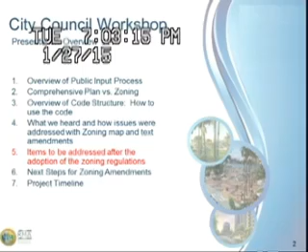One other item we've inserted into the presentation today that you don't have, just one slide at the very end, is to address all of those issues that we will need to address at the end after the zoning is amended for each one of these districts. So I wanted to highlight that before we end the presentation tonight, and then obviously the next steps for implementation and the project timeline.

In terms of the public input process, I know I don't need to tell the council we've had extensive public input throughout this process, but for those listening for the first time, I do want to say that we started this back in March of last year, where we held a kickoff meeting both for the comp plan and the zoning amendments.

Since then, we've had extensive stakeholder interviews, interviews with the council. We've had specific planning workshops held within each one of these zoning districts or neighborhoods, one in particular for the downtown, then the Intracoastal Mall area, and the Highland Village area.

We then reconvened for another workshop with the council to go over all of the entire recommendations for both comp plan and zoning. That was in October. Then starting in January, we held another workshop specifically to address the changes to the comp plan. As you know, we went to Planning and Zoning Board in January to take forward the comp plan amendments, and then we had first reading just a couple of days ago, essentially, for the comp plan.

Today, we are actually holding, again, the workshop just to address the specific zoning changes, both to your map as well as to your text for each one of these districts.

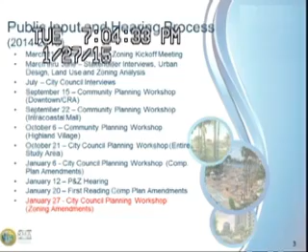So with that said, again, the order in which we're going to present the material is the same order in which we did it for the comp plan. We're going to break it down by the different sub-areas, by the different district areas, beginning with the town center, which is your Fulford City Center, then your employment centers. Then we'll discuss the waterfront districts, the three of them, the mixed-use corridor, which is the area to the south near Arch Creek and Highland Village. And lastly, we'll discuss the neighborhood center mixed-use district.

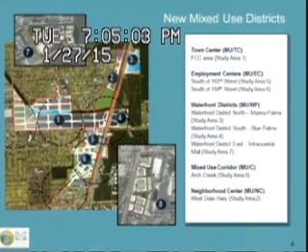In terms of the difference between the comp plan and the zoning, one of the things we've been talking about all along is explaining that difference so people understand why we discuss certain things in the comp plan and other things within the zoning.

Your comprehensive plan, the way it's written today, establishes very general land use categories, and with that are established very general goals, objectives, and policies for each category. Your existing comprehensive plan, or future land use map, establishes maximum densities for each of those land use categories. This is how the comp plan is currently structured.

Your zoning, on the other hand, establishes very specific zoning districts that fall underneath one of the land use categories currently designated in your land use plan. To illustrate, you might have a property that within your future land use plan is designated as commercial, but in that same area there are specific zoning districts such as B1, B2, B3 that fall under that same general land use category but have specific zoning criteria.

So your zoning establishes your maximum densities, your maximum heights, your specific lot standards such as setbacks, lot coverages, etc. All of the details that the comp plan does not entail.

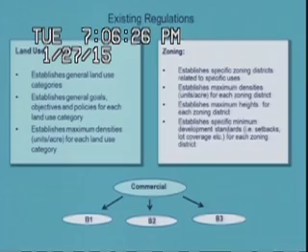In terms of the proposed amendments, we are still proposing to contain within the comp plan and the zoning the same level of detail. For the comp plan, our main objectives, as Jean has presented to you.

Our main proposed changes to the comp plan entail refining some of the existing mixed-use categories, consolidating some of the land use categories that exist today into new mixed-use categories, and then refining the goals, objectives, and policies based on the development scenarios and objectives we've collaboratively developed through your strategic plan and discussions with the board, council, community, and stakeholders about specific objectives for each area. So those have been refined.

In terms of the proposed amendments to the comp plan, the biggest change we've brought forward has been replacing the maximum density allocations for each site with a basket of rights concept. I'll explain that in a minute.

I know we've had several questions and confusion in past meetings, so I've added two slides just to explain that concept, which I think will bring some clarity.

In terms of the zoning, we are still establishing your minimum development standards that entail lot coverage, setbacks, height, and all the specific criteria each development has to abide by.

But in addition, because we're creating a form-based code, we're moving away from text-oriented language to a more visual one, to guide development and ensure the necessary development standards needed to illustrate the kind of development the city wants, and to balance the built environment with the open environment, as well as the aesthetic quality we want NMB to achieve.

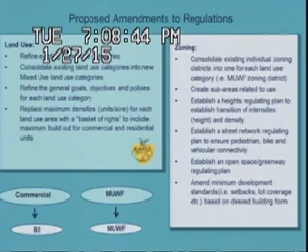So in general, we're going from a general land use category of commercial in certain areas and converting that into a mixed-use district. We've created 7 new districts, all unique in themselves. And we're converting from specific zoning districts such as B1, B2, B3 into another mixed-use district, so all of those will be collapsed onto one mixed-use district.

In terms of the basket of rights concept, I know the question came up last time as to how we arrive at the existing current entitlements, and how we come up with our maximum entitlements.

These next two slides that I'm showing you were not in your package. We developed them after the presentation, after the first reading, to address the comments that came out of that meeting. I hope it adds a little clarity for you as well as for those listening, to address the question of how we came up with the current entitlements.

Can we get copies of those? The type size is too small to see clearly. If you'd like, I'll leave them to the end, and if you have questions I can bring them up. That'd be a good idea—want me to get copies made so you can share?

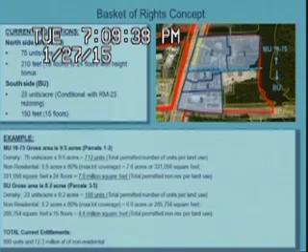Do you want to just run and get those copies?

Could I ask, you've done this presentation many times, but in going over the land use, I thought we were going to concentrate on the zoning. So instead of going over what we did and said, is that really the way to make us have a better understanding? Or should we go into the zoning and then you can always go back?

Well, you're just setting up a little bit of preamble, right? Let's let her make the presentation. They've timed it out, so they know what they're doing. Let's go to that.

That was the question I was asking, though. Can I ask one question, Mr. Mayor? With the comp plan, the workshop was more or less us being lectured. Is there going to be a time when we are going to have a discussion and discuss ideas amongst ourselves?

Yes, there's no reason why we can't do it tonight. I've broken up the presentation into basically 3 parts. The second part, which I'm about to get into, has to do with how to use the code. If you listen to that, then we can stop, break for questions, and then go into the specifics as to what issues we addressed in each district and how the code addresses it. Because if we get the general picture first, we might be able to stop there. Is that okay? Let's carry on.

Okay, so the next part is the code structure and how to use the code. Again, I was explaining that difference between the comp plan and the zoning just to understand on a basic level what we're proposing to change.

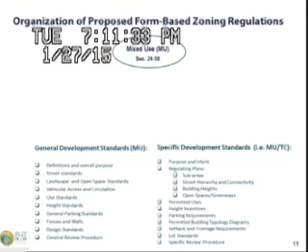In terms of the zoning, we're proposing one overall general mixed-use district called the MU, where all the general development standards that apply to each of the mixed-use districts in the 7 districts will be allocated. Underneath that, there will be 7 separate zoning districts established: town center, employment centers, neighborhood center, corridor, and waterfront districts. All of those have unique, specific criteria that are only unique to that district.

So in the general development standards, you will find all your definitions, the overall purpose and intent of creating a mixed-use district, your general street standards, landscaping and open space standards, use standards, general parking standards, fences and walls, and design criteria.

But then in your specific mixed-use districts, like your MUTC, EC, and so forth, you will have the specific purpose and intent for that district. All of the regulating plans addressing height, compatibility, the street network, and required open spaces will be addressed in each particular zoning district, as well as specific parking requirements, permitted uses, lot standards, and so forth.

So I'm going to start by briefly showing you how you would utilize the code, and then you'll get an idea for how it's actually organized.

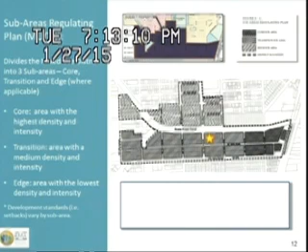If I were a piece of property, let's say I own a piece of property on the east side of 19th Avenue, just north of 164th Street or Hanford Boulevard, and I wanted to know what the code allows me to do with the new development standards, the first step would be to identify which sub-area location my property is located in. This is important because we have a sub-areas regulating plan.

Every mixed-use district is divided into approximately 3 sub-areas, wherever applicable. Some mixed-use districts don't need it because there aren't any issues with adjacency and compatibility with existing single-family homes, so there's no need to break up the district. But other districts, such as the downtown or the employment center, we create these plans to show in a graphic way exactly what that transition needs to be.

So the areas with the most intensity permitted in terms of height and density are allocated in the core sub-area, which is why we have an area called the core sub-area. The area with medium density, or the transition, is the area between the most intense and the least intense.

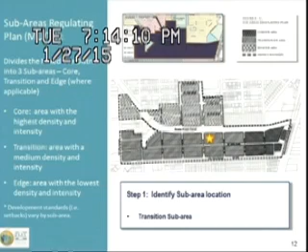And then obviously the edge sub-area is the area with the least intensity that is permitted, both for height as well as density. So that's the first step.

The second step, again, here's my property, is to identify what the surrounding street designations are that have been designated for the property and the streets that are immediately surrounding the property.

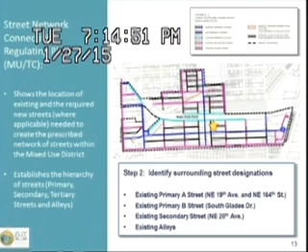This particular property has street designations of primary A, primary B, secondary street, and alleyways. I know that doesn't mean anything to you today, but in the regulations, there are specific criteria for each one of those streets. This plan shows the location of those existing as well as required new streets where applicable. Not every district has that condition, but where it's needed in order to create that prescribed network of streets, that walkability, that pedestrian environment where we want more streets, smaller blocks to encourage that walkability environment.

In addition to that, this plan establishes the hierarchy of the streets. Do you have a question?

Okay, at the risk of us going off the rails, but go ahead. Well, when I was reading this, primary A street is 19th Avenue and 164th Street, and you flip to the next page and it says primarily pedestrian-oriented streets. Is 19th Avenue ever going to be primarily pedestrian-oriented? I'll get to that. I'll get to answer your question when I get to that next slide.

Remember what I am addressing right now: the first part of the code is very general in terms of understanding how to utilize the code and some of the general parameters. In every district, every classification of those streets is going to have a different meaning. So in the MUTC, the primary designation has one meaning, and it's still generally the same for all the districts, but it's going to be tailored specifically for that district. So you will see that when I show the other street designations.

Could you repeat what you just said? Because what I thought I heard you say is that in every one of these mixed-use districts, there are going to be different definitions— No. —for primary A, primary B. So let me get to the next slide.

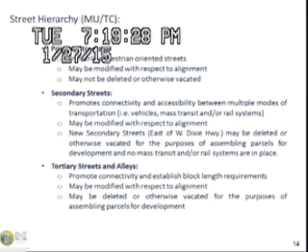Today I'm focusing on the town center, but to give you more information, you'll see within your packages that for each district we've done existing conditions, street sections of the existing conditions for each street we've designated a hierarchy to, and then shown the potential redevelopment of those streets to improve the public realm.

Whether they are primary, secondary, or tertiary, we've addressed it because we think the primary issue is to address pedestrian connectivity and improve the quality of life within the area.

In addition to the new regulations that establish minimum design standards like minimum sidewalk width and minimum landscape width, we've added, for the CRA areas—the town center, the neighborhood center, and the employment center, everything west of Biscayne Boulevard—

for areas within the CRAs, we've created an additional tax rebate, a tax increment rebate incentive, to encourage these kinds of things to happen. I'm going to discuss that in more detail as we get further into the presentation.

In the other areas, like the waterfront districts and the corridor, the streetscape improvements are actually required in exchange for the entitlements that we've given. This is consistent with everything we've been discussing thus far in terms of the design analysis.

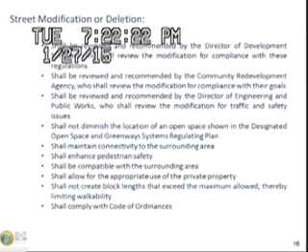It gives the city planner the authority to look at it and ensure it makes sense in terms of connectivity. And obviously, for engineering and public works, to ensure traffic and safety have been addressed. So there's plenty of flexibility, and at the same time enough criteria that keeps the intent alive for that particular district and the overall goals of improving quality of life within the city.

There are numerous criteria they have to follow to do that. The next step—here's my property, the third step, excuse me—is to identify the surrounding designated open spaces and greenways for that particular property in the district.

If you recall, in the MUTC area, we talked about the possibility that certain blocks could redevelop entirely, simply because of the condition of the existing buildings and because the land ownership and aggregation is already there with single property owners.

And we talked about the possibility of those sites contributing to the public open spaces, to the network of public open spaces within the city. So one of the things we've done, especially in the CRA areas, is given an additional incentive: if you do public open spaces, you get a tax increment rebate.

But for this particular site, when you're looking at it, you identify that two things have been designated. One is an urban greenway, which is the area along 19th Avenue—a street that's been called for to be designated and designed as an urban greenway.

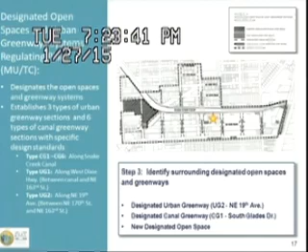And the Canal Greenway, which is the area along South Glades Drive, along the Snake Creek Canal, as well as a new designated open space.

With the designated open spaces, there are new regulations that establish minimum design standards, so that it's not just a piece of property that's been dedicated or called an open space but has no real meaning for a person to utilize. So we have specific development or design standards for each one of those.

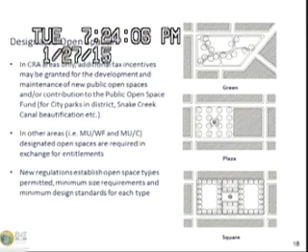For the greenways, just like the streetscapes, we have street sections that illustrate the potential redevelopment of, for example, the Canal Greenway along South Glades Drive, showing the area between the private property and the public property. All of that constitutes the urban greenway.

Within the public side of the greenway is the area that's within the right-of-way along the street edge that contains the public sidewalk and landscape area. We show potential improvements for what we would like to see that area become. There are about 5 different sections created for the entire Canal Greenway along Snake Creek Canal, both north and south, addressing each of the specific right-of-way conditions along the Canal Greenway on both sides.

It also shows on the private side what the minimum required setbacks as well as frontage requirements are within the private site that the developer would have to adhere to when the site gets redeveloped. All of this together creates the overall greenway environment, which improves the quality of life and pedestrian accessibility within the city.

The next step is to identify the maximum allowable height permitted for your site. This property that we've been discussing is permitted a maximum of 25 stories, or 315 feet. Somebody corrected us - we had the wrong number when we were cutting and pasting. In this particular location, that site is permitted 25 stories or 315 feet.

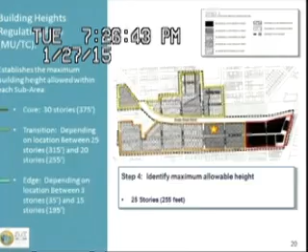The next thing is to select the building type for your property. In the general mixed-use regulations that apply to all mixed-use districts, we've created a series of building types. Because the code is form-based, we're careful of the massing, scale and look of the building. We're not dictating architectural styles, but we are dictating massing and scale to encourage a more pleasing environment and quality of life, since massing and scale affect view sheds, light, and the balance between built and unbuilt environment.

We've provided a total of about 7 building types, from the most intense to the least intense. Your tower building type is the most intense - it is required for any development higher than 8 stories. From there you have the liner, the courtyard building, the flex building, townhomes, side yards, and courtyards, ranging from most intense to least intense. All of that detail is in your package.

Not all of the building types are permitted in every sub-area. The reason for that is to ensure we have that transitional element for the heights and intensities maintained throughout that district.

You will see that in each one of those diagrams we create, for each one of these building types, we specifically state in plan view, section, and 3D your minimum development requirements - setbacks, lot widths, lot areas, lot coverages. We're making it very visually clear for both the developer and the property owner the intent of the overall development. We don't want ambiguity, so we're creating more illustrations to make this code easy to read.

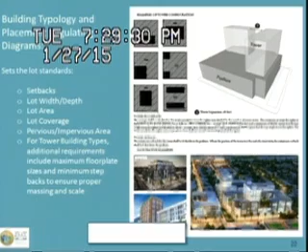Can I just ask you one quick question?

The slide from two back, the one before this that says figure 7, the little diagrams on the right - that's a tower? In other words, that's a tower. Yes, that is a tower.

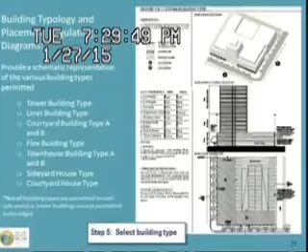Then the next thing is to basically review what the permitted uses are for your property. Now that you know your sub-area location, your maximum height, and what streets or open spaces you're required to improve, develop, or provide, you just look at your permitted uses table.

We didn't include this because all we did was take the existing uses and categorize them so it's easier to review. We're going to provide that in your next package. Essentially what we did is clean it up so it's easier to find a use when it's grouped into a specific category.

Obviously we've broken it up by sub-area, so just like the building types, uses are regulated by which sub-area they're in. The most intense uses are permitted in the most intense sub-area and so forth.

This is basically the last step of how you use the code to interpret what development potential you have for your site - reviewing all the additional standards that apply, such as parking, signage, landscaping, required assessments, the approval process or conditions. And this one in particular has to do with the tax increment rebate incentives.

We developed a menu of options specifically for the CRA areas - your town center, neighborhood center, and employment center. Almost the entire town center zoning district is within the CRA area. There are portions outside, such as the Nova University site and portions of the west, that are not within the CRA, but it applies to most of the area within the CRA. The entire neighborhood center is within your CRA, and almost the entire employment center is within your CRA - only a portion of the east side of West Dixie is not.

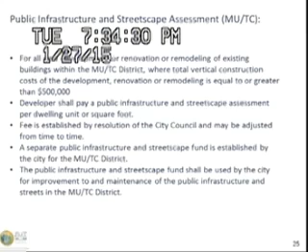One thing to note is that we're making it very flexible. If there's already a project in place or in the capital improvements program for the city, say for 19th Avenue or the West Dixie corridor, and it's better for the city to take the fee and allocate it toward that overall project, the developer and city have the ability to do that. Whereas for other streets, it may be better for the developer to build the improvements themselves because they'll see the improvement happen quicker, and that benefits the city too. So this allows flexibility for both options: pay into the fund, or develop the streetscape improvements and still get the tax increment rebate.

The public open space assessment follows the same criteria. The purpose of this fund is to utilize it specifically for the Snake Creek Canal greenway improvements. Depending on where the city is, they may prefer to take the money and do it as one large continuous project, but it's specifically used for that, as well as existing public parks, open spaces, and recreational areas already within the mixed-use Town Center District.

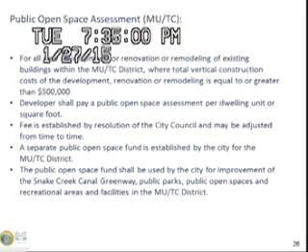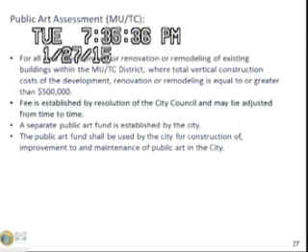The public art assessment is similar. The only difference is that since the city is interested in an overall public art fund for the entire city, we felt that monies collected for this fund could be utilized citywide, not just for that particular district. For renovations of existing buildings, the fee could be established by the city council. However, for new development, we've proposed allocating 1% of total cost of construction. That's something to evaluate.

The last couple of steps have to do with the approval process and what's been specifically prescribed for that particular district in terms of conditions or approval process. For every mixed-use district, all 7 of them, there is a pre-application meeting required, spelled out in the general mixed-use district regulations that apply to all. This is specifically addressed for each one to cover its specific issues. Just like the comp plan, where we identified specific issues for each mixed-use district, we've identified the same within the zoning for each district. For the MUTC, the issues were treatment of the Snake Creek Canal, the alleys and utility issues, public art, and incentives for redevelopment within the CRA.

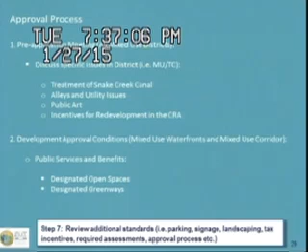The second component is the development approval conditions. For all the other districts, meaning the waterfronts and the corridor, since they're not within CRAs, we've spelled out specifically at the end of each district's text the specific development approval conditions. In the mixed-use waterfronts, as I'll show in the example later, these are the expected public benefits and services we've discussed—open spaces, greenways, traffic mitigation—all specific to each district.

So we can stop here if you'd like. Yeah, good, okay. All right, so now we want to get into questions about the mixed-use TC district. Is that the deal, or before we jump to the next one? The general overall structure, if you have any general questions. Okay, we'll start with that.

Got one here. I really just want a little bit of clarification regarding that presentation. Let me just save it.

Thank you. This tax incentive, is it a one-time thing or is it continuous? How does that work, so that everyone understands?

We have not ironed out all those details. We've been talking about it internally with legal. This is something the council needs to determine, whether they want it to sunset at the end of the term of the CRA, or sooner. It's up to the council to decide how they want to do that. We haven't specified it yet, but it follows the existing CRA tax increment rebate process, so it would be similar.

How many years do we have left in our CRA? Anybody know? Did I see Rasha here? 14 years? Might be 14 years, through the duration of the CRA.

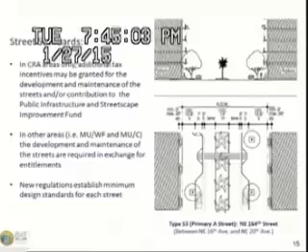When you mentioned the thing about turn lanes and stuff like that, is that up to us or is that a DOT thing?

Depending on who owns the road, if it's a city road, it's up to your engineering department to determine what that level of improvements are.

So would that apply to this road, or would that be county? Tell us what needs to happen there. I believe Hanford is a city road. Am I correct? Yes, I believe Hanford is a city road. But for example, West Dixie, there's portions that are owned by the county, so you will have to coordinate between the county and the city for the ultimate right-of-way improvements.

So it's county, not FDOT. At what point does FDOT get in there? Is that only Biscayne? Only when it's an FDOT or state road. Okay, correct. All right.

I didn't mean to sound like I knew something that other people didn't know, but I think this is a good time, since we've had this discussion, to clarify how traffic studies fall into play with all of this, when they're needed, for the audience.

To address the issue of the number of lanes and whether you need to expand the right-of-way from what it currently is today, that's something that's going to be decided at a site plan level when the site plans come in, and then you do the traffic analysis for each particular site.

Now, the regulations that are in here. Can I just ask one quick clarifying thing? When you say extend the right of way, you're talking about widening a road. Correct. Okay, in plain English, that means widening a road, right? Correct. Widening the road, because I think Councilwoman Spiegel said, what if we need to widen the road? Is this going to lock it in place?

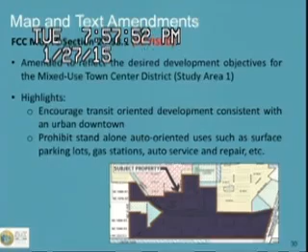Again, some of this you're going to hear is a repeat, but if you recall, based on the comp plan discussions, the things we are addressing in the town center is really to encourage a transit, pedestrian-oriented environment and developments, and prohibit standalone auto-oriented uses such as surface parking lots, gas stations, auto service and repair. Some of these general policies and objectives have been carried through into the zoning as well.

The issues that were raised for the TC were the treatment of the Snake Creek Canal, the alleys, the utilities, public art, and the incentives for redevelopment in the CRA. Some of this is repeated, but I want to show you in the language where we've addressed it. At least for the TC, is the only one you're going to hear twice.

Basically, section 24-58T of the mixed-use district, this is where we require in the language specifically a pre-application meeting for each and every one of these zoning districts. For the TC in particular, to address at that meeting prior to any site plan applications, the utility locations in alleyways, the treatment of the Snake Creek Canal, the placement of public art, and the eligibility for tax increment rebate. We've put this in here to remind staff, whoever it is that's here five to ten years down the road, that was the focus of that particular district.

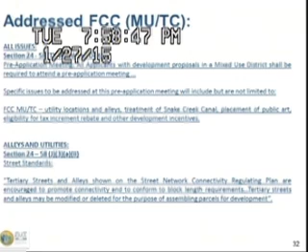In terms of the alleyways and utilities, if you recall from the general mixed-use standards as well as here within the MUTC, we have specific language that talks about tertiary streets and alleyways having the ability to be vacated in order to allow for parcel assemblage. So that's just to illustrate where in the code that is.

Same thing with the Snake Creek Canal. By implementing the open space and urban greenway systems regulating plan within the code, we've actually provided those illustrations that show specifically the kind of improvements we want along the canal and those greenways, those streets that have been designated as greenways.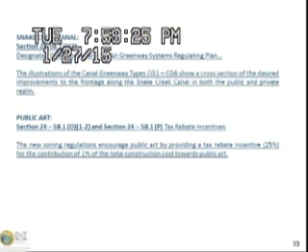In terms of public art, we've created that table, that menu of options for tax increment rebate, one of them being the public art, and we talked about the assessments. We talked about that menu of options.

So I'm going to jump right into the employment center, since this is the new district, and we're going to talk about specific issues within that district. If you recall, during the whole discussions, both through the design analysis as well as the comp plan amendment process, the main objective or goal of that particular district is to encourage economic development that is supportive of high technology and service-based activities that will bring an employment base to that particular area and for the city overall.

In addition to that, we talked about limiting, as one of the goals, all types of auto-oriented uses. Not in terms of limiting them entirely—we're still allowing them and they're acceptable—but they have to conform and be designed in a way that it's compatible with the pedestrian environment, and that it encourages pedestrian and transit use.

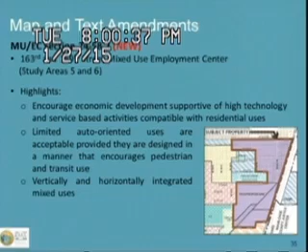We encourage vertically and horizontally integrated mixed uses, so this is not the kind of district where everything has to be vertically integrated. You're allowed to have standalone non-residential uses as well as standalone residential uses, and it's still considered a mixed-use district because you have a mixture of higher, more intense types of uses within this district.

In terms of the issues that were raised, this one in particular, we had the compatibility issue with the adjacent lower density residential, single-family residential to the west, and the potential historic designation of the TICO building. Those were the two issues that were raised during the whole process.

In terms of how we've addressed them, through that pre-application meeting, any development that comes into this site, we've specifically requested or require within the code that they have to address the issue of compatibility with the residential. We also talked about requiring some sort of clearance that the land is developable within the employment center district, especially if it's the area along the former TICO site.

Did you want to ask? Yeah, did we ever determine for sure if that TICO building is historic or not?

But it needs to be addressed when people come in. I don't think they'll be coming in very soon on that side, but they know they have a historic building. Enough said. Cool, thanks.

So in terms of compatibility with the adjacent single-family area, this specifically addresses the former TICO site on the west side, just south of 159th Street. In section 24-58.2 of the Employment Center District, we've put in specific language addressing the land use principles and the requirement for that transitional area immediately adjacent to that single-family residential.

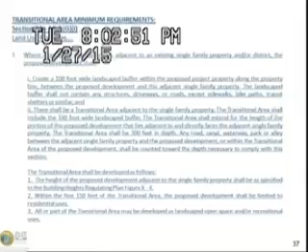One of the other requirements is that within the first 150 feet of that transitional area, any new development proposed there has to be residential in nature, so it's compatible with the existing single family to the west.

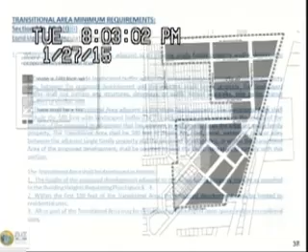Here is the Building Heights Regulating Plan for the entire Employment Center District, including both the 163rd Street South and the 159th Street areas. You can see overall we've allowed the 20-story allocation, particularly along the main commercial corridors. But we've addressed the height compatibility issue for that site along the western portion adjacent to the single family. You can see that in the plan, and we've actually shown the 100-foot landscape buffer.

Again, this doesn't dictate the kind of design or layout of the site. It just shows that for the first 100 feet, there's some sort of landscape buffer required. Then for the area between 100 feet and 300 feet, there's a maximum height of 4 stories. Between 300 feet and 400 feet, a maximum of 8 stories is permitted. Beyond 400 feet up to 500 feet, there's 12 stories. And beyond 500 feet is basically where the 20 stories are permitted to begin. That's really addressing the main issues of the community.

Also, I wanted to reiterate that this particular site or area came in front of the planning board with a different scenario proposed for the transition of heights. The planning board asked the property owner, the developer, to actually come through our process for amending the comp plan, both the comp plan and the zoning. The height transitions you see here are the ones the planning board supported and asked us to move forward. In addition, the next district is the waterfront districts.

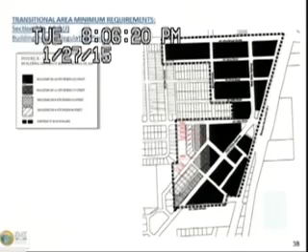I don't know that they want to be exposed to that open space the developer might provide on their side. It's a private backyard, so we want the wall, I think it's better for them. Never mind, go ahead. I just thought of something else, but this may open up a lot more, so we'll keep going forward and open it later.

All right, the next district is the mixed-use waterfront districts. We've compiled all three into the next few slides, broken up by specific issues. In general, for all of the waterfront districts, the goals and objectives stated in the comp plan and reiterated in the zoning talk about maximizing the economic and aesthetic resource created by its waterfront location and its geographic conditions.

It also talks about the requirement of public access to and beautification of the waterfront, and allowing for additional multifamily housing, enabling residents to actually live within the waterfront districts, again creating places where people can access the water.

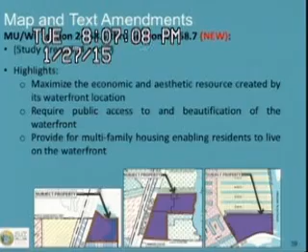In terms of the issues raised in general for all three, again, public access to the waterfront. For the South Waterfront District in particular, the issue raised had to do with the screening of the existing FPL substation over on the east side of the district.

In terms of the Eastern Waterfront District, there were several issues raised. The first begins with the compatibility of that adjacent lower density residential to the west, or Eastern Shores. The improvement and expansion of the existing neighborhood park for Eastern Shores. The additional access points to the East Waterfront District, including direct access onto 826. The retaining and enhancement of the Miami-Dade Rescue Station for the community itself, and the addition of a police substation.

for Eastern Shores. So I'm going to go into...

I object to the use of the word park to describe the existing neighborhood park in Eastern Shores. Can we call that a postage stamp instead? It's a tot lot. You're right, it's jarring.

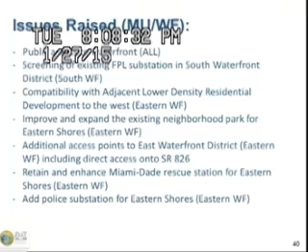Again, it's not access onto State Road 826, it's from and onto. It's important that folks grasp the concept that traffic going east needs... We are, and as I explain in the Eastern Shores section, we'll show you the exact verbatim language being put into the code regulations. This was just to give an overall view of all of them, but I will address it when I get there.

In general, for all of the mixed-use waterfront districts, that pre-application meeting - I know I sound like a broken record, but we keep putting it in for each of these districts to ensure that all of these issues have been clearly spelled out in each one of them.

So again, for the north, public access to the waterfront. For the south, appropriate screening and residential views related to the electrical substation. And in the east, all of the specific issues.

Specifically, the addition of multiple access points, including direct east and west access onto State Road 826, traffic mitigation such that the development does not overburden Northeast 35th Avenue, public access to the waterfront, the retention and enhancement of the existing Dade Rescue Station, addition of a police substation, and long-term maintenance.

That's just a general overview, right at the beginning of each of these districts, these are spelled out. We're later going to show you how these are actually addressed specifically within each one of the districts.

So starting with the northern mixed-use waterfront district, that's the area immediately north of the Marina Palms development. Under land use principles, in letter C, we've added specific criteria to require active use along all levels of the development fronting the waterfront, again to encourage a more active and lively waterfront experience.

Under section 24-58.6, we've established the criteria for the designated open spaces and greenway systems regulating plan for that specific district. And just like in the example I showed you of the MUTC, for all the waterfront districts, and this one in particular, we actually have specific street sections that show what they should look like, both from the public as well as the private side.

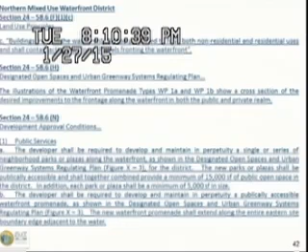For the North District, the public services basically require the developer to develop and maintain in perpetuity a single or a series of neighborhood parks or plazas along the waterfront, as shown in general in the designated open space plan. Each one should be a minimum of 5,000 square feet, or in combination 15,000 square feet if the properties assemble and aggregate land to develop one holistic site.

In addition to that, it's the requirement for the developer to provide, develop, and maintain in perpetuity a publicly accessed waterfront promenade, as shown in the regulating plan and the street sections that follow.

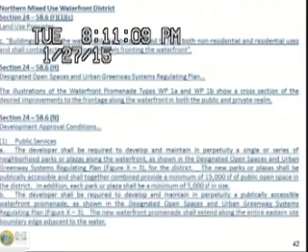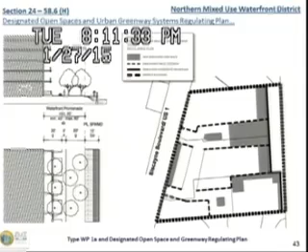And with that, I'm going to go straight into the open spaces and urban greenway systems regulating plan for the North Mixed-Use Waterfront District. You can see here, very schematically, the allocation of that waterfront promenade, the general streetscape or section on the left that shows the active uses along the waterfront and the minimum sizes of the sidewalks required to establish this concept.

For the Southern Mixed-Use Waterfront District, we applied the same concept with the land use principles, the requirement of active use along all levels.

In addition, for the Southern Mixed-Use Waterfront District, to address the issue of incompatibility with the electrical substation, we've added specific language that says new residential or mixed-use development adjacent to the existing electrical substation shall be designed so the substation is entirely screened along the adjacent side and not visible from the residential portion of the building. This gives flexibility: if it's entirely commercial or office, that's not as important, but if it is residential, it must be screened.

Section 24-58.5 again establishes the open space greenway systems regulating plan. The development approval conditions for the Southern District are specific and relate similarly to the one for the North, with a requirement of a minimum open space of 5, or a combination of 15 if developed entirely together. There's also a requirement of plazas along the waterfront and publicly accessible space along the waterfront. That's pretty much what's required for that area.

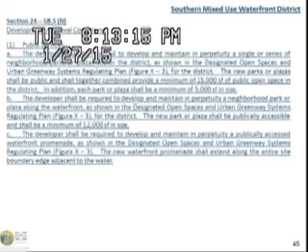Question about item E, the screening of the adjacent electrical substation. I'm concerned the way that's worded could be problematic. If somebody builds, say, an 18-story building, how are they going to screen it from view from residential units? Since you're up high, you're going to see it no matter what you do.

Yes, if they're building a 30-story tower, but if the site is wide enough, a 6-story tower will look down into it. One way is to position the residential tower facing the north side, the water view, and turn the building so only certain units or fewer units face the substation. Another way is to move it directly over to the Biscayne portion of the site, and put parking structures and similar elements adjacent to the electrical substation instead.

Let me ask a different question: does this allow flexibility for the professionals? I think it's important that we not over-engineer this. If somebody assembles all that property and puts it together and says this is how we're doing it, because this is what people want and what works, is that going to trip things up and be a hindrance? I don't think we should let anything in there that's a hindrance to reasonable things being done. And remember, at the end of the day, it's the people who buy that will have the ultimate say in what's acceptable.

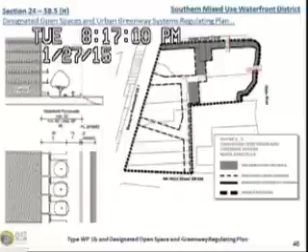Again, we illustrated to show that it's important to denote on the development for that site. This picture is kind of for illustration purposes, right? That's not saying this is absolutely written in stone, like this is where the grass is going to be. Correct, it's going to be flexibility for the design professionals and the architects and the developers and everybody to come together with what works.

Correct, okay, absolutely, got it. And to some extent, that's where it has to be, because aren't you mandating that there has to be public access to the waterfront? Public access, yes. Now the design, whether it meanders exactly like that, whether that open space is exactly where we're showing it.

Right, you see that thing going into the middle. It depends, there's something in the middle. Not in the middle, but some of that has to be there, plus that one on the north, the larger square on the north in the center—they've actually gone to these sites, and that's owned by the South Florida Water Management District. So that's access. So in a way these are showing it.

In many cases this should be the location of this, but I also want to point out, for a representative of one of the property owners who's here: say you're just going to come in and build the corner. What we tell you by this map is that you don't have that park, that open space—if you're just doing the corner, none of that is in your spot. So it also gives some certainty to that property owner that we're really not looking for this thing right on the corner. This is more a waterfront thing.

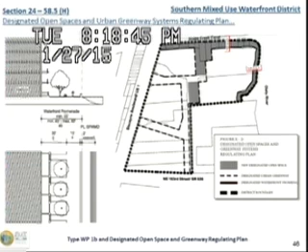Mine is just kind of a general question every time there's one of these pictures, because I just want to make sure that we're not in the business of designing, that we're not handcuffing ourselves by saying you must do it in this way, because that's not realistic or reasonable. It's the intent, not the okay, got it. And the language—I didn't understand it that way. I understood that when they come in with the project, that's what I do. I just wanted to be clear for my comfort.

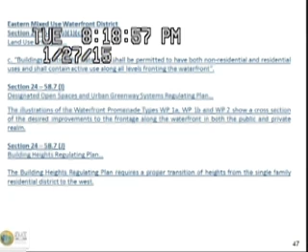All right, so the next waterfront district, the Eastern Mixed-Use Waterfront District—again, within the land use principles, we've established the requirement for containing active use along all levels of the development that front the waterfront. Like the other district, we've established the designated open spaces and urban greenways systems regulating plan with specific criteria. In addition, we've established a building heights regulating plan to address the issue brought up by council and the community regarding transition in terms of height and scale.

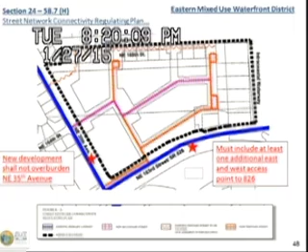So I'm going to start with one at a time. The first plan here is the Street Network Connectivity Regulating Plan. If you recall the issue raised about the multiple access points off of 826, both east and west, to and from—one of the things we're doing with this regulating plan is illustrating the level of connectivity that is necessary. It doesn't mean the streets have to be designed and built in that particular fashion, or the block pattern is going to be this way, but it does call attention to the need for a higher level of connectivity. That connectivity is there to prevent any impact onto Northeast 35th Avenue, to not overburden it. So the requirement of multiple access points to and from east and west of 826 is in the language and in the regulating plan to illustrate the concept.

In terms of the designated open spaces and urban greenways regulating plan, if you recall, we've talked about enhancing the existing tot lot area. This plan clearly shows that tot lot area and its relationship to the rest of, or in context to, the rest of the district.

You can see the existing tot lot area on the northwest portion of the site. The new gray areas are the additional open spaces that are possible within this new development.

In the regulations, we prescribe in the development approval conditions, which I'll get to at the end, a minimum size requirement for that particular open space that's accessible for everyone within the Eastern Shores District. You can see here the same level of design standards and criteria required for the waterfront promenades and all the other urban greenways connecting pedestrians within the district.

Just one thing to note: in this particular area, we went from an existing tot lot of 5,800 square feet to a potential additional 6.3 acres of open space that the developer has the ability to maneuver, design, and place wherever they feel necessary, as long as there's public access to it. But it gives that insurance that there's the level of quality we're expecting and predicting will happen within that development.

Before you leave the green space thing, you know, ever since this property went on the market, the attorney Jeff Bercow brought several potential bidders that wanted to ask my opinion on certain things.

I remember I came up with my personal 5 criteria of things that I thought the community wanted in order to make anything there realistic or feasible. One was that the traffic had to be dealt with. The second was that it had to be maintained as a neighborhood town center mixed use—it could not be just residential or just commercial.

The third was that it had to be connected and interwoven with the community and upscaled, so it's not like it is now, this suburban mall kind of just plopped in there where there's no real walkability or connectivity with the rest of the neighborhood.

The fourth was that there had to be some land given to the city for a park, because what the entire community of 5,000 people there has right now is a postage stamp. And that to me is just unacceptable.

The last one was that there would have to be some sort of mechanism where impact fees would be collected into some sort of fund to help mitigate the impact going in there.

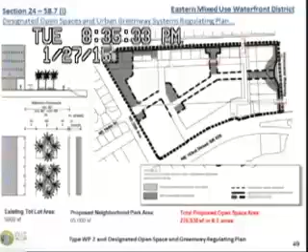But if that one particular single owner wanted to redevelop and completely demolish their building and build new, they would be required to do the access to the waterfront on their piece. But what do they do about the connectivity in the roads? How would that work? You can build a development and say, I don't know what's going next door, but I'm going to leave 50 feet.

But in this green space example, it's not like mixed use south. Mixed use south, there's only one guy. Well, actually, mixed use south, all the properties have a cross use easement for the access. I'm sure this one does too, I don't know what it is. We haven't looked at it, but there has to be access through one property to get to the property in the other corner.

I would say if the corner property came in separate, I think 90% chance they're going to get together. But if the guy comes in by himself, we're still going to apply these regulations. There's still going to be a waterfront promenade along the property, there's still going to be street frontages, and we will plan it and help design it so it will fit.

I understand that. How do you do that when you're talking about the tail wagging the dog? This is the question Councilwoman Smith asked earlier. How does one guy on the block do something? If you're the one guy on the block on Hanford Boulevard, there's already an existing street, and you don't need an easement because it's our street.

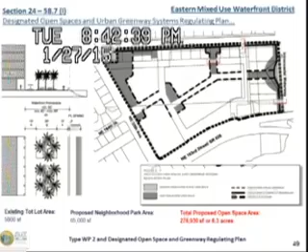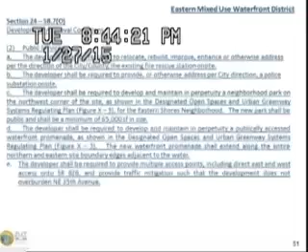In addition, we've specifically spelled out the development approval conditions for the Eastern Waterfront District. In terms of public services, there are 5 additional approval conditions. One is the requirement for the developer to relocate, rebuild, improve, enhance, or otherwise address, per direction of the city and county, the existing fire rescue station, since more than one agency is involved.

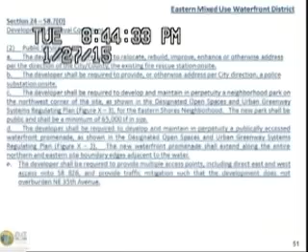The requirement to provide or otherwise address, per city direction, the police substation on site. The requirement to develop and maintain in perpetuity a neighborhood park—on the northwest corner, though we'll revise that so it can be anywhere within the site as deemed necessary. Also the requirement to maintain and develop publicly accessed open space, a minimum of 65,000 square feet.

In addition, we've provided for the requirement to develop and maintain in perpetuity a publicly accessed waterfront promenade, which will apply to any property owner within that site. Lastly, the requirement to provide multiple access points, including direct east and west access onto State Road 826, to provide traffic mitigation so the development does not overburden Northeast 35th Avenue.

Can I ask a question? I know this may be getting silly, but the northern exit out of the existing center—along the canal, they come out by the rescue station? Can we mandate that traffic cannot turn right and go through the guard gate? Because that guard gate is part of a special taxing district maintained by the residents. Is that part of 'shall not burden 35th Avenue'?

Correct—in fact, showing open space along the entire western edge alludes to not wanting more openings onto Northeast 35th Avenue. But there's already an existing one there, a curb cut. It's a driveway, not a street, but we could put in a limit on the number of access points if we wanted to.

I would second keeping that for site plan review. I think you're getting into too much detail there, because what if that area ever gets redeveloped—there should be design flexibility for what's actually going to work.

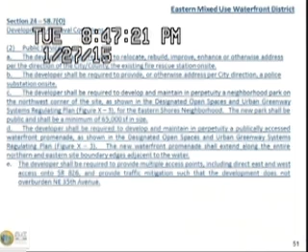When we're looking at an actual set of plans, that's when staff would take those concerns and work with it. Question: when you do a traffic study, do the professionals determine the word 'overburden'? No—they have to show the existing conditions and the traffic from the new development, according to a standardized level of service.

They don't make up the definitions of what's acceptable and what's not. There are adopted levels of service: A, B, C, D, E. That's what I was asking. So we overburden...

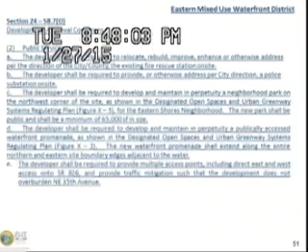Developers also submit their traffic study to another consultant to review it independently. So the overburdened isn't just in the eyes of the developer. The developer does the traffic study, submits it to the city, then the city sends it to somebody to look at. Is that what you just said? Yes, I think that's what they do, our own consultant.

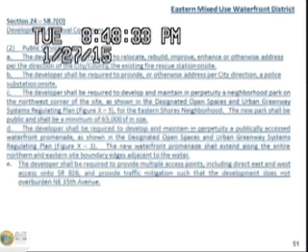I look at it too, but generally we have a consultant that reviews traffic studies. Yeah, I remember I saw this. I've never heard a traffic consultant say, no, that's way too much traffic. And our third-party consultant said that two months ago about something. So yeah, it happens. All right, we're good?

Good. Are we now to MUC? We're now to MUC, that's the Mixed Use Corridor District.

This is the area east along Biscayne Boulevard near the Arch Creek and Highland Village residential area. The goals and objectives we identified for this area are to maximize its location on a primary transit and business corridor, encourage economic development, and support both local and regional activity, including a variety of workforce and market rate housing.

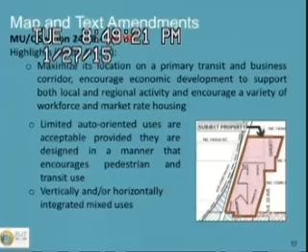We're encouraging limits on auto-oriented uses. They're still acceptable, but should develop in a manner that encourages more pedestrian and transit use. This is like the employment center, allowing for vertically and horizontally integrated mixed uses.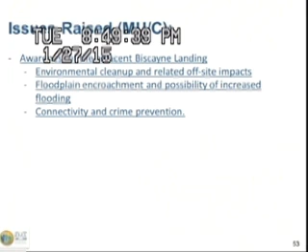In terms of the issues raised during the process, there was a need to create awareness of the adjacent Biscayne Landing environmental cleanup, related offsite impacts, floodplain encroachment and possibility of increased flooding, and connectivity and crime prevention. Those were the issues that were raised.

In terms of zoning, very much like in the comp plan, we've addressed those issues by ensuring that through the pre-application meeting, those issues are discussed up front with the applicant who comes in with a site development proposal. We also found other issues that needed addressing within the mixed-use corridor district, which we addressed by creating regulations for the district.

One had to do with street network and parcel assemblage. In the urban design analysis for that area, we talked about the difficulty of those parcels being triangular in shape and the very awkward configurations of the block pattern in that particular area.

We talked about the possibility of allowing certain streets to actually be vacated for the assemblage of properties, very similar to the town center district. It's also a unique condition here in the corridor district.

Other issues we addressed include the possibility of integrating more open space, since this is another area east of Biscayne Boulevard that lacks open space within its district or neighborhoods, as well as compatibility with the adjacent Highland Village residential neighborhood to the south.

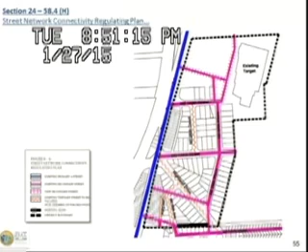To address that, we've created the Street Network Connectivity Regulating Plan. This shows the streets we could potentially designate as tertiaries that could eventually become vacated for assembling parcels, giving that level of flexibility for new development within the area.

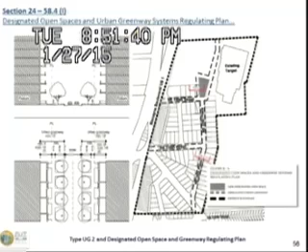We've also created the Urban Greenways Open Space Regulating Plan, similar to the other districts, identifying a possible location for publicly accessed open space, primarily on the portion near the Target site where there's one single landowner with a substantial amount of property. We've created development standards, design standards for the greenways, and the open space types.

In terms of development approval conditions, this is where we spell out the requirement for open space. For development sites greater than 150,000 square feet, if a developer or property owner assembles property of that size—like around the Target site—they would have to provide publicly accessed open space of a minimum of 15,000 square feet. This is intended for larger developments, whether assembling or developing the outparcels along the Target site.

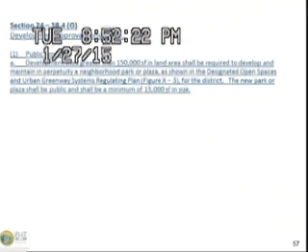If they did that with that threshold, that would be required. In terms of the transitional area minimum requirements, this is no different from the employment center or from the Eastern Waterfront District. We have specific criteria to help protect the existing Highland Village neighborhood on the south in terms of height encroachments and to protect their compatibility.

Even though they're considered a higher intensity residential district, they're not necessarily single family. We still put in some parameters there to protect that. We've required a 50-foot landscape buffer, a transitional area as well that's actually defined within the building heights regulating plan, and the requirement of residential uses within the first 150 feet. So within the building heights regulating plan, you can see we've done the same thing as in the other districts. We've located transitional areas to, again, protect that residential district from incompatibility of uses and height.

In terms, now we're going to get in, go ahead. Just when we had been in Highland Village and spoken to the Highland Village residents, we talked with them, and it seemed to make a great deal of sense to change the zoning code to allow homes to go vertically like Key West style homes. We're going to work on that.

But it's not in here? It's separate, it's a completely different zoning district. It's actually MH1, I believe, which is what it's currently designated today. At the end of the presentation, there's a list of to-do things that we need to address, and that is one of them, which is a simple text amendment to the MH1 zoning classification that says within lots of a certain size, they could be greater than 2 floors, etc.

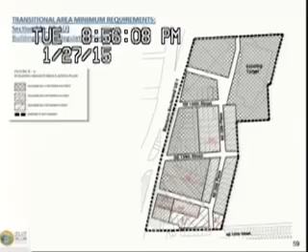Moving ahead to the last district—last but not least, the neighborhood center, which is the area immediately to the north of the Spanish monastery. It's a very small district, encompassing only 4 blocks in total. The main objectives and goals established throughout this process were, again, to encourage a balanced mix of uses characterized by compactness, pedestrian-friendly design, and a neighborhood scale, since it is the neighborhood center. The other goal is that development patterns should reflect design principles such as walkable neighborhoods oriented around the 5-minute walk and public transit systems.

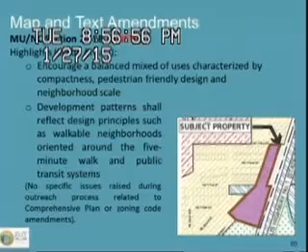While no specific issues were raised for this particular neighborhood center, and we talked about that in the comp plan, we did address certain things that we felt were necessary as part of our changes to the code. One is improvements to the West Dixie Highway Corridor. We're currently in discussions with both the county as well as the CRA and the city for the ultimate improvements to that corridor.

We've put in certain criteria here that we think is important for that portion that's within the private realm or the public realm that requires the minimum sidewalks and landscape features. We've addressed the requirements for open space and greenways as well in this district.

Even though it's very small, we think that there are possibilities for that to happen here, and the compatibility with the adjacent residential districts to the west.

In terms of the open space, this diagram is very simple, but it definitely designates the West Dixie corridor as an urban greenway. You can see the specific requirements we allocate on the west in terms of the improvements to the minimum sidewalk spaces, landscape requirements, and even a median to connect with the rest of the corridor improvements to the north and the south.

All of this in particular has to be reviewed with the county and the city. But there is a designated open space on the north portion of the property.

that both the city and the private owner share. We think that there's an opportunity to create a very nice, sizable open space right at the corner that has the ability to function as a public plaza.

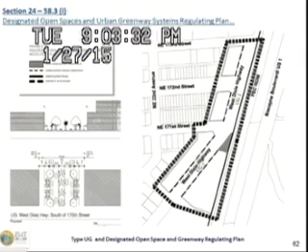But that makes the bend and goes north to connect the monastery. What is this one called? MUNC - Neighborhood Center. So somebody could leave from MUNC and have a contiguous walkway going down, a walkway and bicycle path all across the bridge, then back behind on the south side of the canal, all the way to Mishcon Park and up to Miami Gardens Drive if they want, and back around. It really creates the ultimate in connectivity.

I agree with Councilman Smith - I think we need to pick that piece up somehow.

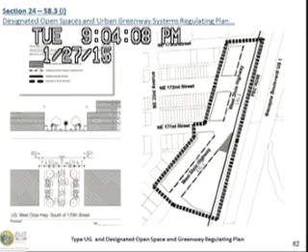Why not extend it so that it connects to the nursing home? Let me finish - yes, in terms of the greenways, the canal greenway that we've established for the north portion of the Snake Creek Canal is contemplated with our required improvements to the canal greenway, as well as the West Dixie corridor. So in the discussions we've had with the CRA as well as the county, the goal is to expand and connect the improvements we're showing in the neighborhood center to the improvements to West Dixie Highway, which is the link to the TC.

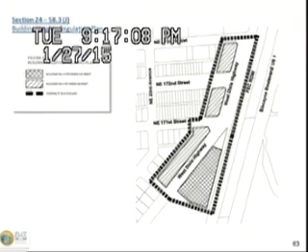Yes, okay, so the last two points to discuss for the neighborhood center have to do with that compatibility issue in the building heights regulating plan. We were very sensitive here with the adjacent lower density residential to the west by ensuring the maximum height along that western portion is 4 stories, and then anything on the eastern portion could go up to the 15, which is actually what they have today. Obviously this would allow for more flexibility in terms of their site utilization.

After this, I wanted to talk about the items we know we have to address after the zoning is in place, after we adopt the comp plan, after we adopt the zoning amendments. Those relate to the city council establishing a resolution for the funds for both public infrastructure and streetscape improvements, public open space, and public art funds—establishing the funds through resolution and establishing the fees for each one.

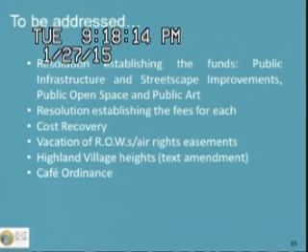We do need to address the cost recovery issues, the vacation of right-of-ways, and air rights easements. There's currently no language in place within the city addressing that, so we have to develop the ordinance and the requirements and process for vacating right-of-ways and establishing air rights easements. Also addressing the Highland Village Heights issue through a text amendment, and addressing the cafe ordinance if we want to encourage sidewalk cafes within each of these mixed-use districts. So these are the things still pending that will have to be addressed afterwards.

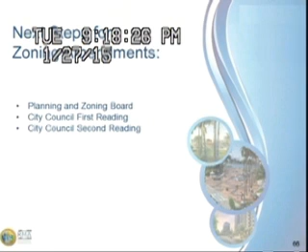In terms of next steps for the zoning amendments, we have to go to planning board, scheduled for February 9th in the next couple of weeks. Then city council first reading and second reading. For the zoning regulations, it's the workshop February 9th for the planning board, and city council first reading is March 3rd, which means you have a little bit over a month for us to address any other concerns you have.

We can meet on a one-on-one basis if necessary, hold any more discussions needed to address the specifics of the code, and we technically have all the way up to second reading to address any final tweaks. I do want to mention March 3rd is crucial because by that point, hopefully we will have the comments back from the state for the comp plan transmittal.